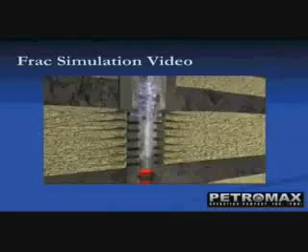This frac simulation video will illustrate visually what computer frac modeling indicates happens in a sandstone reservoir during and at the conclusion of a typical hybrid slick water frac. The blue fluid represents the frac pre-pad and slick water portion of the treatment. This stage initiates fracture patterns and creates fracture length.

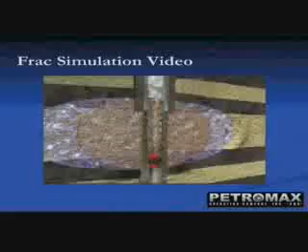The brown fluid represents the sand-laden stage, which is pumped periodically during the middle stages of the job, and is at its highest concentrations at the end of the job to act as a proppant, thus creating greater reservoir conductivity, resulting in substantially higher production rates.

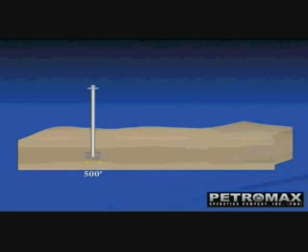With the recent use and understanding of microseismic technology, it is believed that one single vertical Cotton Valley sandstone well has an effective drainage area of approximately 500 feet. Current Texas Railroad Commission rules require 1,200-foot spacing between most Cotton Valley wells. This spacing pattern is leaving large quantities of natural gas unproduced.

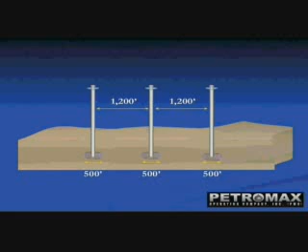It has been assumed by operators that the Texas Railroad Commission will eventually lessen the rules to allow downspacing, and additional infill vertical wells would then be drilled to drain the remaining gas. The mechanical technology to drill horizontally has existed for decades. Understanding the parameters under which it was best suited, and more importantly, how to complete and stimulate a horizontal well

bore has taken longer. Until very recently, most horizontal drain holes were fracked as if they were vertical wells, by simply pumping a single stage into the horizontal drain hole, with no ability to segment or divert the frac job to stimulate the entire exposed zone.

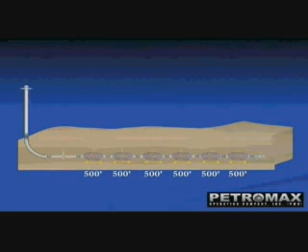However, with the recent development and successful implementation of the open-hole Packers Plus system, the industry is able to accomplish just that. Staged frac jobs designed to be pumped sequentially can now treat the entire drain hole and effectively produce gas from an area that would have historically required numerous vertical wells to produce the equivalent amount of gas.

The Packers Plus system utilizes a system of open-hole packers and pressure-activated ports to selectively isolate the treatment area. Each packer contains an increasingly smaller orifice, which allows a sealer ball to be dropped from the surface to temporarily bridge off one completed frac job and allow for the immediate subsequent job to be performed in an order from

toe to heel. After the last frac job is completed, the well is opened and the sealer balls are flowed back to a ball catcher located on the surface, thereby commingling all of the separately fracked zones.

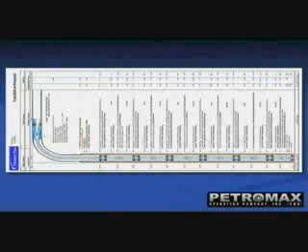This slide is a closer look at the Packers Plus tool turned vertically for ease of viewing. The distance between packers can be customized to effect the optimum drainage coverage. The example shown was designed for a Freestone County Cotton Valley well, with 342 feet between the isolation packers.

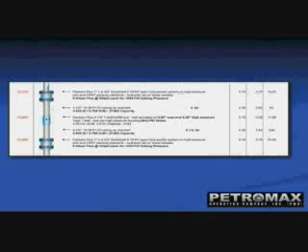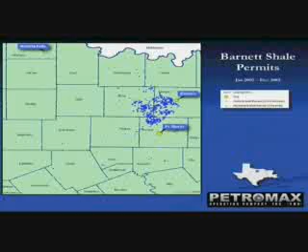This technology is also being utilized in oil reservoirs. The Curtin field had produced over 35 million barrels of oil from the mid-1970s through 2005 and was thought to have been drilled out. Approximately 1 year ago, 2 horizontal wells were drilled and successfully completed, and now there are 63 horizontal permits and growing in the field.

Of the wells that have verifiable production data, 3 of the 6 are located in Freestone County, drilled by Anadarko Petroleum. The 3 existing horizontal wells, the Williford A 6H, 7H, and 8H, are fortunately surrounded by older vertical wells producing from the same zone, which makes it very easy to evaluate the viability of horizontal versus vertical wells, given their close proximity to each other.

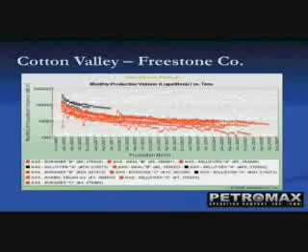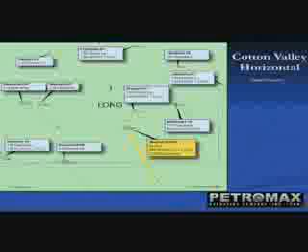The analysis of this data reveals that not only have the horizontal wells initially performed better, it appears that the proportionate increase gained is being sustained. JW Operating has recently released data on their Maynard 3H horizontal well in Smith County. The Maynard number 3H has 13 months of reported production and also is surrounded by older vertical wells.

Also pictured are the number 5H and number 6H wells, which have been permitted horizontally by JW Operating. The Maynard number 3H well was drilled horizontally through the Taylor section of the Cotton Valley Sandstone. The Packer Plus system was not in use, and only 2 frac jobs were performed.

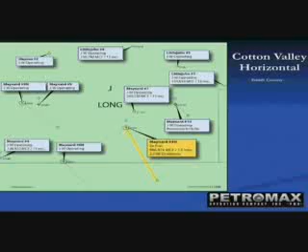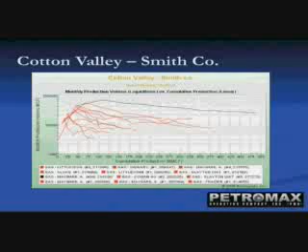Once again, the offsetting vertical wells are depicted in red, with Maynard number 3H in black. It appears again that the initial benefit gained from a horizontal well bore is being sustained as the well continues to produce. The 4 vertical wells immediately surrounding the Maynard number 3H are detailed here.

These 4 wells averaged an initial production rate of 817 MCF per day, with a 13-month cumulative production average of 162,032 MCF. Using a $7 flat gas price, they have averaged $1,134,229 in gross revenue for the first 13 months.

The Maynard number 3H had an initial production rate of 2,224 MCF, a 13-month cumulative production of 486,812 MCF, and $3,407,712 of comparable revenue, resulting in a 300% increase.

Projecting the estimated ultimate recovery of the 3H well compared to the offsetting vertical wells, you can extrapolate an additional 3 billion cubic feet of gas producing approximately $21 million of additional revenue. Remember, this well was completed without the Packer Plus system and only 2 fracs.

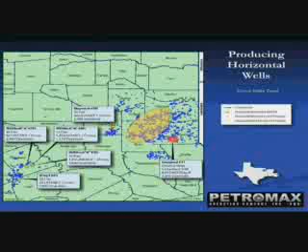The first horizontal Cotton Valley well completed with the Packer Plus system was completed in August of 2006. It was Devon Energy Haygood number 11H well in Panola County. The Haygood well, like the previously shown horizontal wells, was drilled in an area surrounded by older vertical wells.

This chart compares the initial production of the surrounding vertical wells to the Haygood number 11 horizontal well. Initial production is approximately 7 times better horizontally.

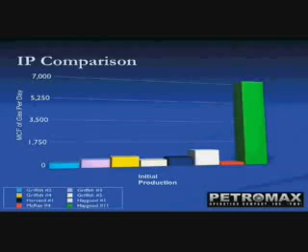Devon has just recently filed their Texas Railroad Commission Form G5, showing an initial production test on August 31st of 06, reporting a flowing gas rate of 6,635 MCF a day and 105 barrels of oil per day on only a 12/64-inch choke. Devon has also turned into the Texas Railroad Commission August and September production figures.

Devon reported gas sales of 456,593 MCF of gas and over 4,000 barrels of oil for August and September combined. We do not know the actual first day of sales, so these numbers could represent totals for anywhere from 31 to 60 days. Using a $7 gas price, the well would have generated approximately $3.8 million in less than 2 months.

The recent filings also indicate the horizontal drain hole was drilled in an upper Cotton Valley stringer, not the historically more productive Taylor section. The number of operators filing horizontal drilling permits in the Cotton Valley Trend is growing each month, and it appears that this new technology will significantly impact the play and benefit those operators who have the drillable acreage to develop.